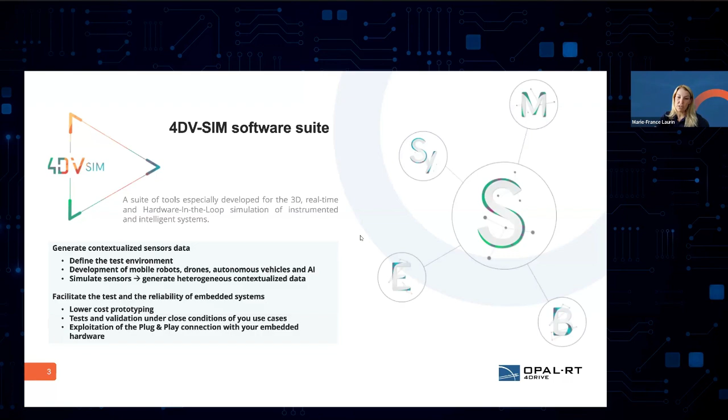We know that drones have been used more and more in the mining industry. We're not going to focus on that today, but we just wanted to put it out there that we can also connect the ground vehicle with the drone vehicle if that's something that you have.

So basically, the methodology when it comes down to 4DV-SIM, I'll go briefly on that, is you define your context, use the library of 3D environments that is already in the system, but you can also import any other environment elements that you would need for your business case. Then you upload everything, then instrument with the same sensor, generate emulated data from real sensors, the same mode of communication protocol, media and hardware connection as with the real system that you have.

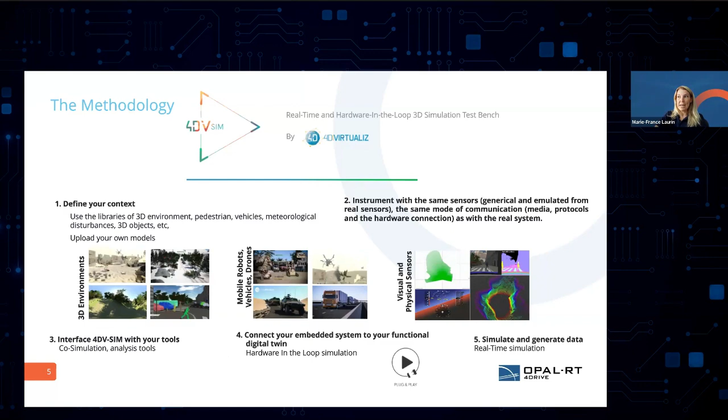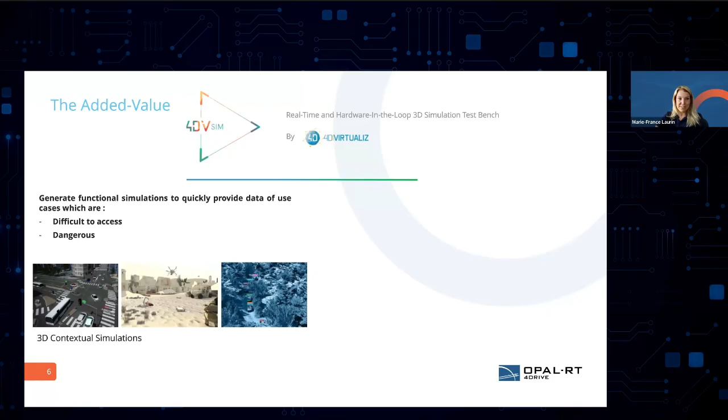So the added value that you'll have from the 4DV SIM is to generate the functional simulation to quickly provide data of use cases which are difficult to access or dangerous. I like to call it the triple D for people on the line who might have heard me before: the dull, dangerous, and dirty. So difficult to access, dangerous, and really dirty environments where you can use this virtual simulation.

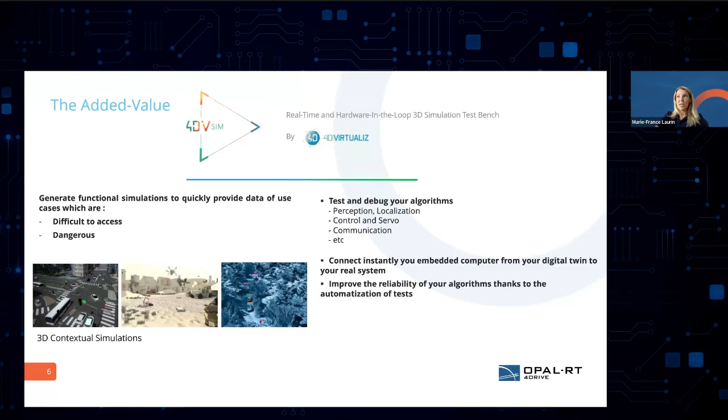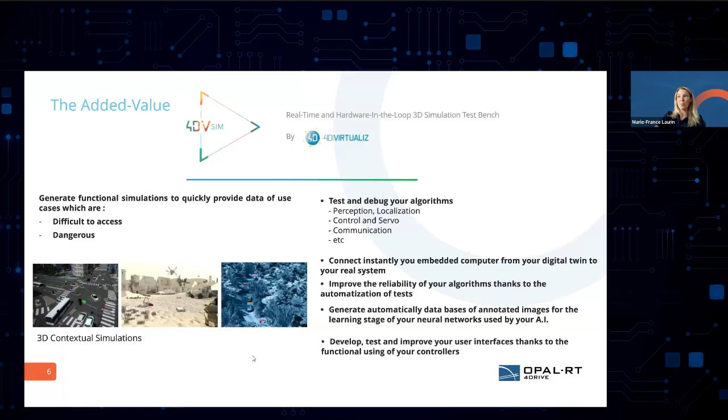Test and debug your algorithm, the perception, the localization, control, communication, connect instantly your embedded computer from your digital twin to your real system, improve the reliability of your algorithm thanks to the testing, and then generate automatically a database and annotate images for the learning stage for the network used by your AI, and develop, test, and improve your user interface.

So the software, I'll go quickly on it, then I'll let Valentin explain it more deeply. The 4DV simulation has 5 different tools that you can connect to. We call them the modules. You can pick and choose anything that you need within that. Some people need all of it, some people just need a couple of them. So Valentin, I'll let you go a little bit deeper into those different modules.

Sure, thank you Marie-France. So as Marie-France just mentioned, there's a methodology into which we develop the simulation. The 4DV editor is the first tool that I'll talk about. It's the tool where a library of vehicles, of environments, of sensors reside, and this is the tool where we put those things together. We put the environment, one or multiple vehicles, we instrument the vehicles, even the infrastructure. Really, sensors are independent in that way, and this is why we can do multi-agent simulation.

And so in the editor, this is where we create these scenarios. Now, to go further and customize scenarios, for example for the mining industry, bringing environments like an open pit mine, certain vehicles like haulers and excavators, we would use the 4DV System Designer.

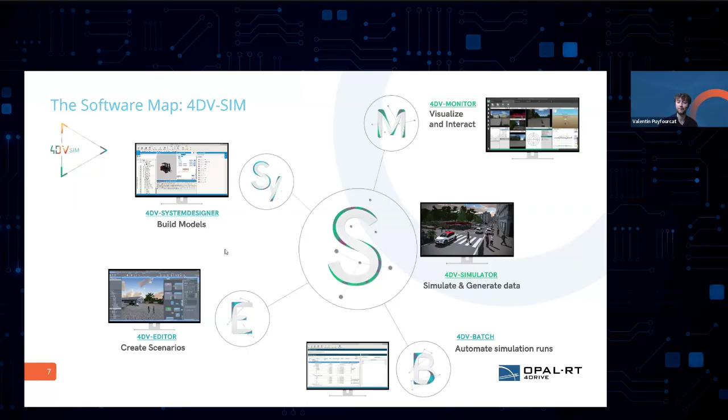So those are the full software suite. Now I guess it's time to jump into the demo. I'll just share my screen.

While you're sharing your screen, I want to answer a question in the Q&A from Hishan about the forestry industry. Today we're talking about the mining industry, but you can take any industry or environment you want to test and apply this to it. We're just giving an example in mining, but everything we're showing today could be applied to any other type of industry. It was just easier to tell the story by having one industry, one demonstration, one video that we're doing from zero to the full demonstration. But that can be applied elsewhere.

4DV is specialized in everything that has to do with off-road. So forestry is definitely one of those off-road opportunities where you can see similar needs. Just to specify, it's not just for mining—mining was just an excuse, quotation mark, to tell you the story about what we can do. The challenges are very similar for those two industries: complex terrain, complex machinery. So yeah, I'll go ahead.

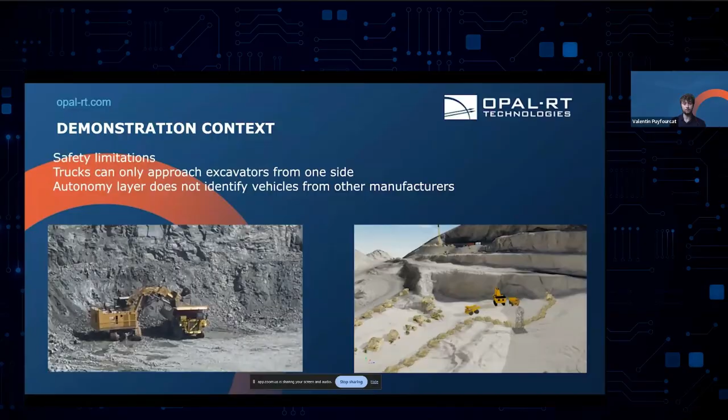On the right side of the screen, you can see this same situation recreated in simulation, where we recreated multiple trucks approaching and parking on both sides of the excavator, something that was not possible in the real operation. That was our goal: to recreate the ballet of trucks moving through the mine, getting loaded with material and emptying it somewhere else, and then use that environment to possibly test and validate new capabilities that haven't been deployed in the field.

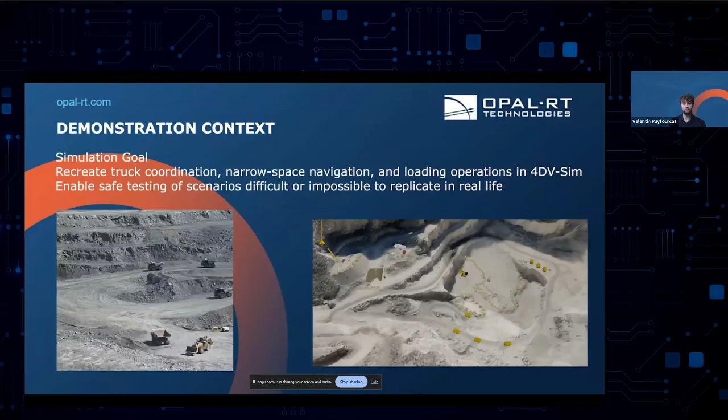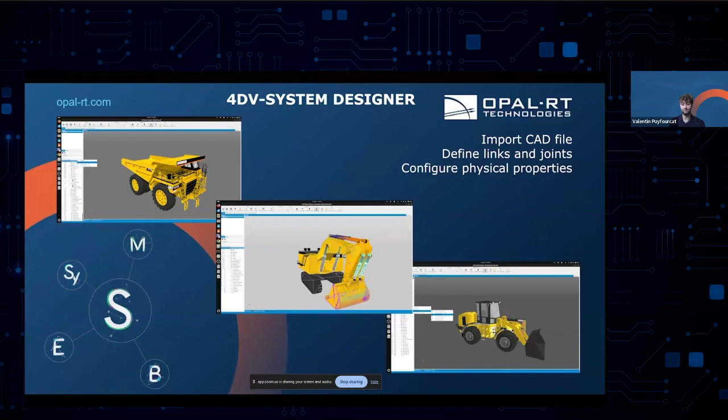So how do we build this? We start in 4DV System Designer, where we import 3D models of the vehicles and environments. We configure their physical properties, their joints, and other parameters so that each model accurately reflects its real-world counterpart.

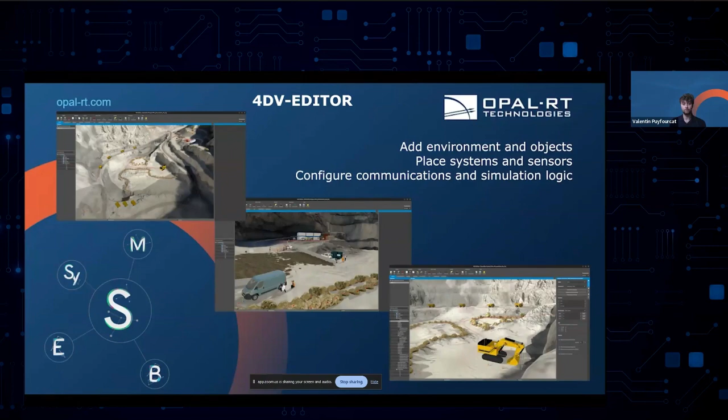From there, we move on to the 4DV editor, where we lay out the environment with the multiple vehicles, contextual objects like the rocks you see in the center of the screen, workers, pedestrians, and other side vehicles. All of this adds realism to the scenario and enhances the quality of the simulation. We also place and configure sensors on each truck and set up the communication and simulation logic.

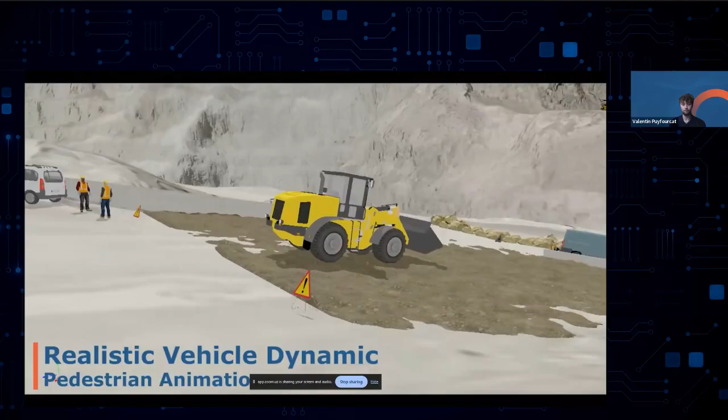Now, walking through the simulation footage, we begin with a camera fly-over of the mine, where we can see a smaller vehicle navigating rough terrain. We're showcasing some of the disturbances we can add to the simulation — in this case weather variation: rain, fog, and snow — along with their potential impact on perception systems.

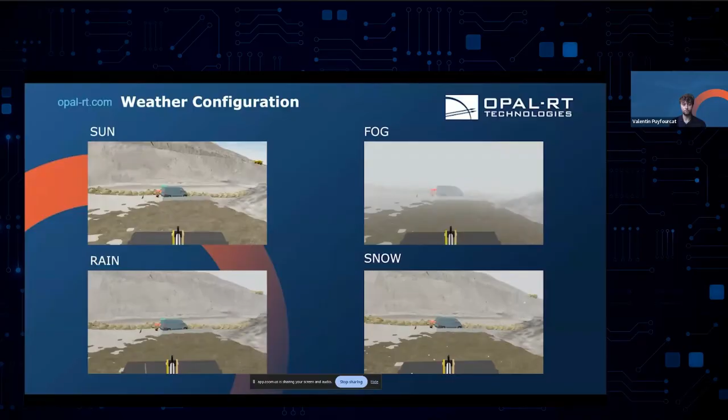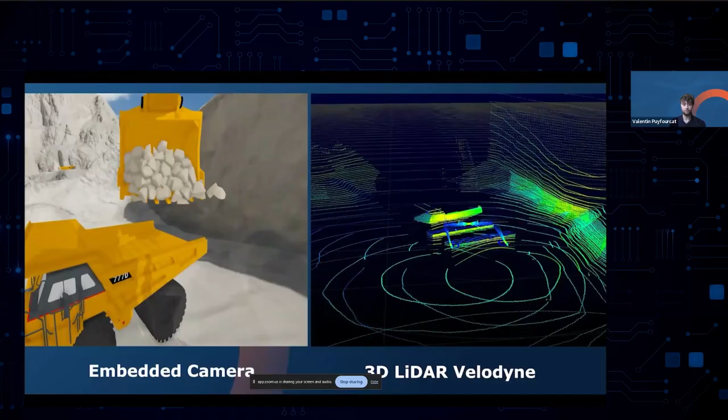We then demonstrate material loading, rocks being picked up and loaded into a truck, which has a real effect on the vehicle's dynamics. On the right, you can see a 3D LiDAR view, in this case from Velodyne, detecting those rocks in real time as they dropped into the bed.

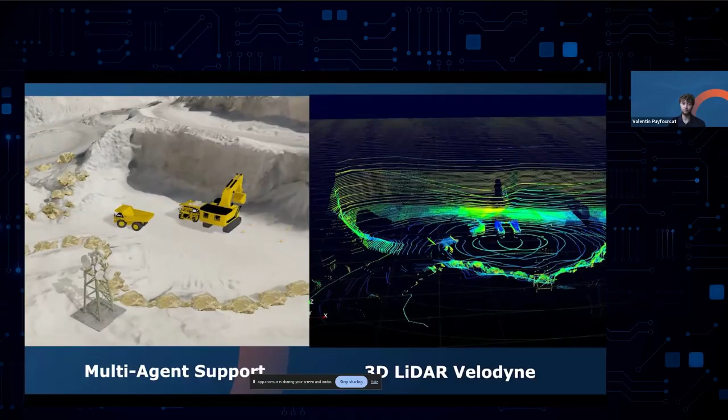Next, we highlight multi-agent support. Once again, there's no limit on the vehicles — you can run as many agents as the hardware allows. Sensors can be placed on all of these vehicles, anywhere in the scene really. Here we've distributed multiple Velodyne 3D LiDARs so we can get a point cloud view of what's going on, matching with the camera data on the left.

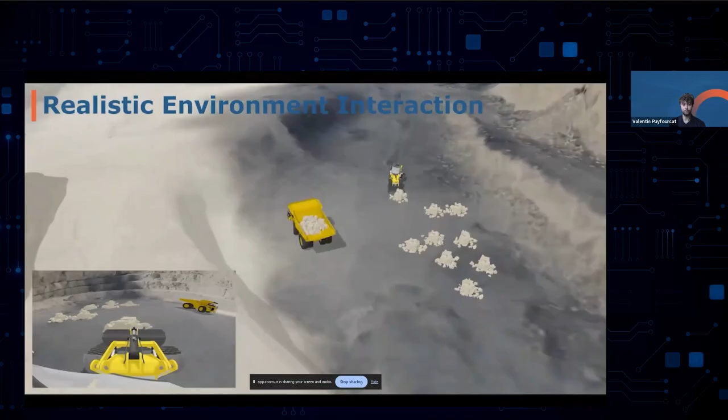What follows is a time lapse of all these trucks in the mine in full operation over an extended period of time, trucks being loaded, cycling through the sites, and parking on either side of the excavator. To be transparent, the coordination logic was built by us for demonstration purposes, but this would be the integration point for different OEMs and mine operators that wanted to test these systems ahead of time in a safer environment, receiving sensor data from GPS, IMU, LiDAR, cameras, and then sending back control commands to each of the vehicles.

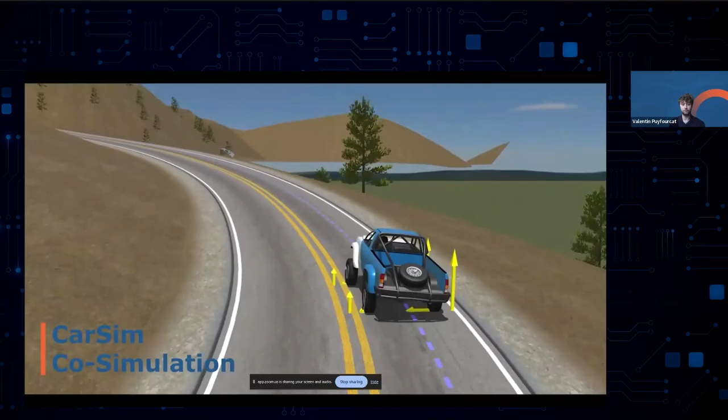Now, if you already have simulations you want to reuse, we can co-simulate with 4DV-SIM. Our simulation engine is optimized for real-time performance, and it's not as accurate, let's say, as dedicated vehicle dynamics tools like CarSim, for example. So we decided to implement a co-simulation with CarSim using the FMI standard as an example.

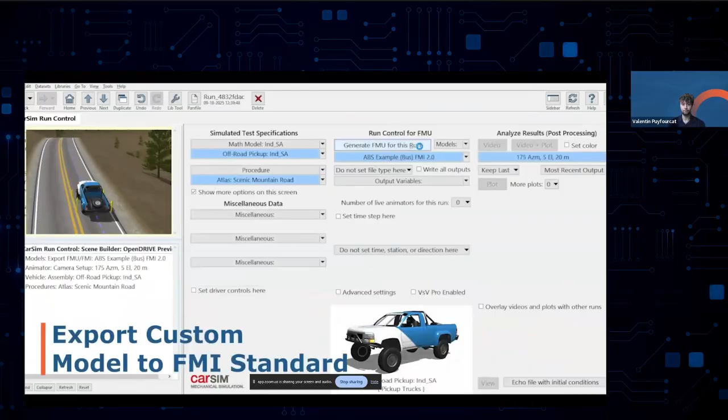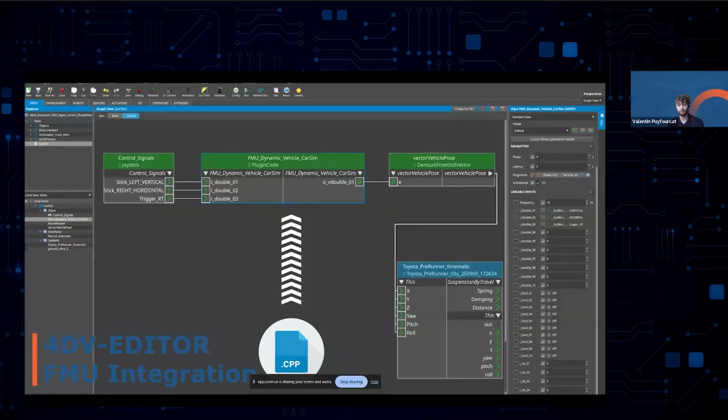We configured a truck model in CarSim, exported it as an FMU, and integrated that directly into our editor using our C++ API. For this demonstration, control signals like steering, speed, and braking inputs coming from a joystick controller are sent to the FMU. The FMU returns, at every synchronized time step, the vehicle's position.

We then apply that position to our vehicles along with the vehicle's sensors. In other words, 4DV runs the simulation, sends control signals, waits for the FMU's response, and places the vehicle exactly where the physics model says it is. Then the sensor data are generated and transmitted just as they should be.

And yep, that wraps up the demonstration. Thank you.